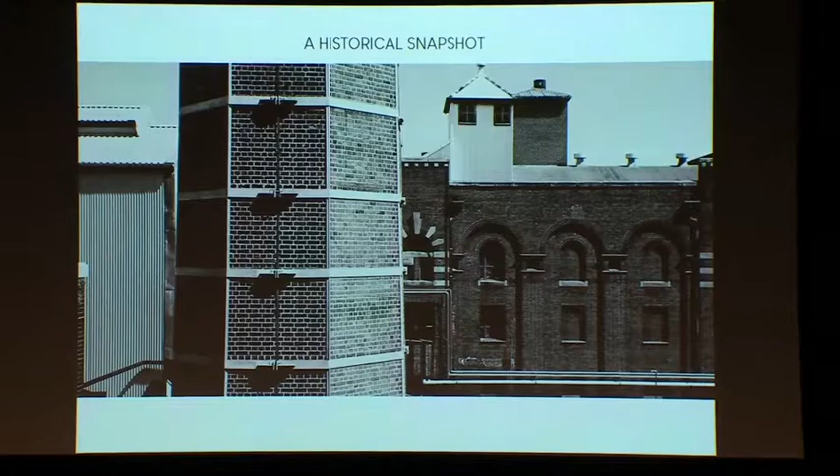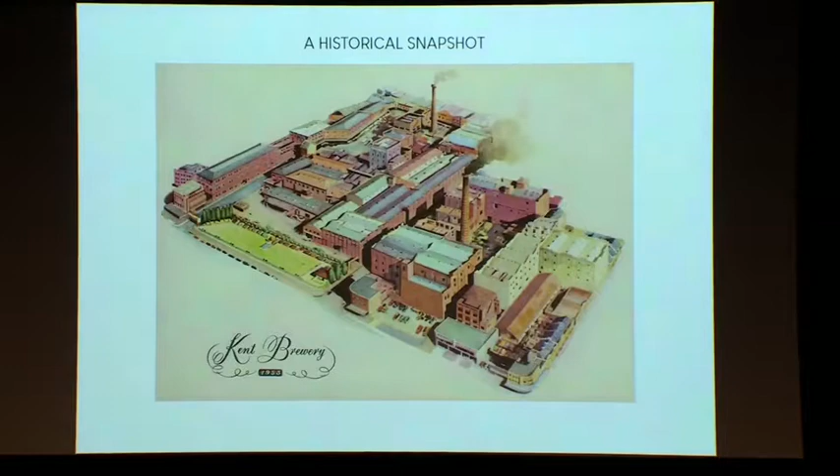It's got grain that you only get on a few projects in your life. It was landlocked. It was progressively used as a brewery since the turn of last century, and just recently, 10 years ago—this is my 11th year on the project—it became a development site.

There was an initial master plan that our client, Frasers Property, Dr. Stanley Quek, who's a Singaporean, was leading Frasers Property at the time. And we inherited this plan. It was a good urban plan.

You know, lots of streets. It was a classic kind of urbanist, Sydney urbanist plan. It had a park which was very beautifully located in terms of connecting to the existing neighbourhood.

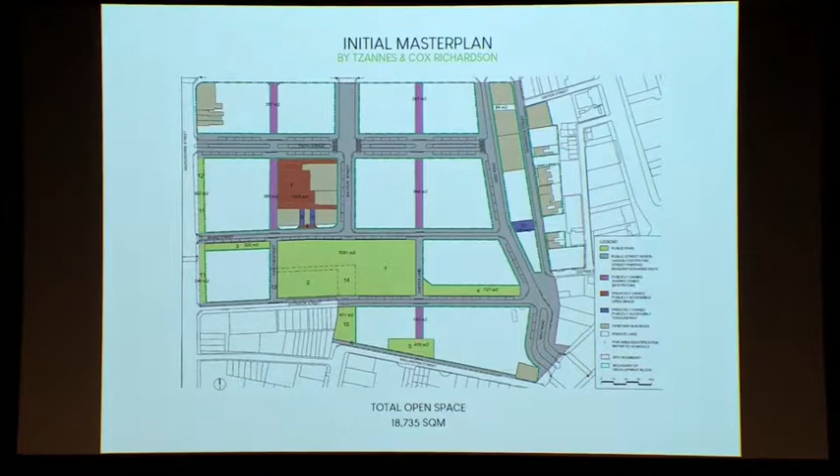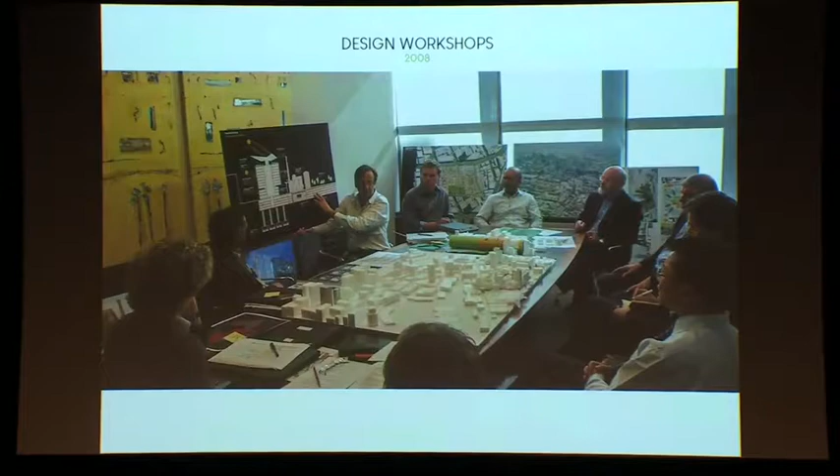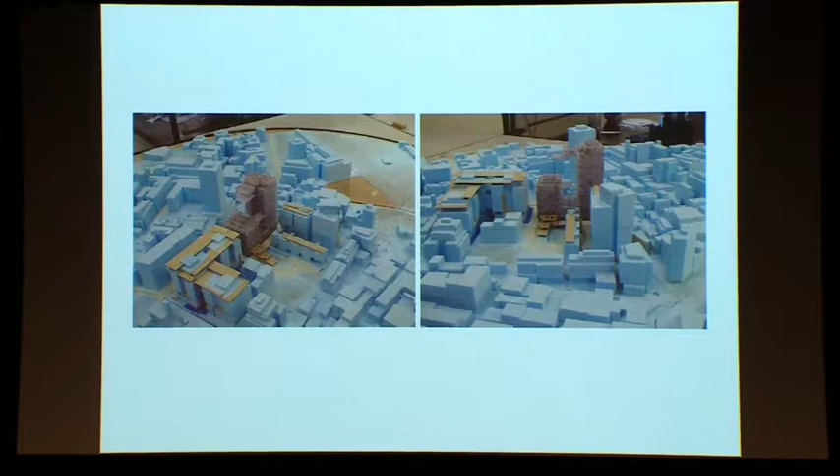But this really stitched foundations for stitching the project back together. One key thing was that it didn't have much open space. So led by Foster and Partners, I was working with my friend and colleague, Jeppe Andersen, a Dane, as we've seen today, working through the master plan team, looking to try and get more out of this project.

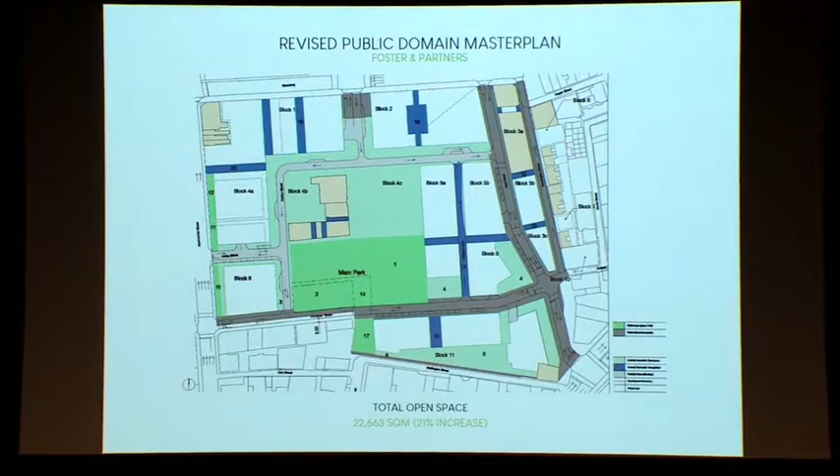So getting more from less. What we got to from the public domain perspective was, how can we move the buildings around, take a building out of the centre, shift that onto the outer perimeters? There used to be a building there. We moved the densities around to the edges, the city edges, not the surrounding community edges, and created a bit more open space.

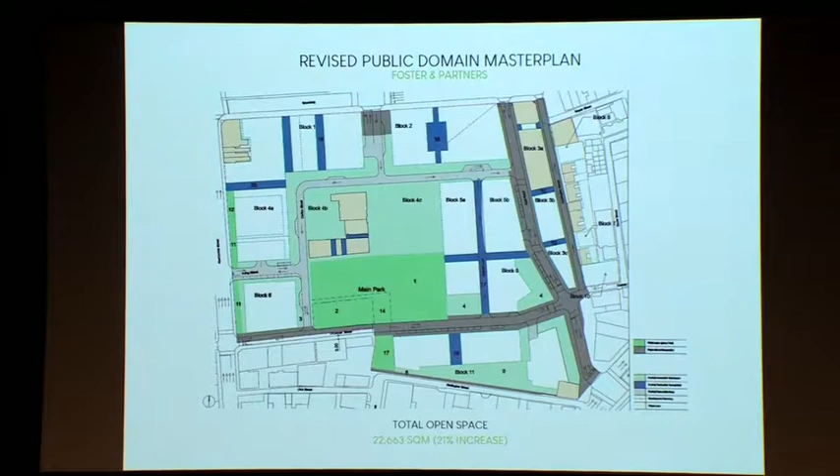We turned off a few of the streets, so took the cars out—a very anti-urban move in some circles. It was controversial, but we kept all the key links, just pedestrian now. And what you got was a very much increased open space—we managed to increase it by over 20% simply by repurposing and reallocating various bits.

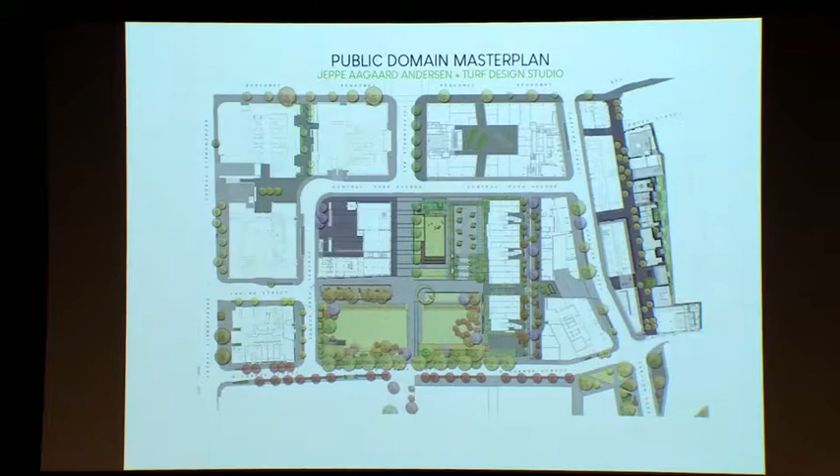If you know Central Park, it is a very dense project, and you know how used it is. I think taking those cars out and creating a kind of urban campus hybrid is generally regarded as reasonably successful. And then, as we do as designers, we start making specific elements within the plan—a whole bunch of spaces.

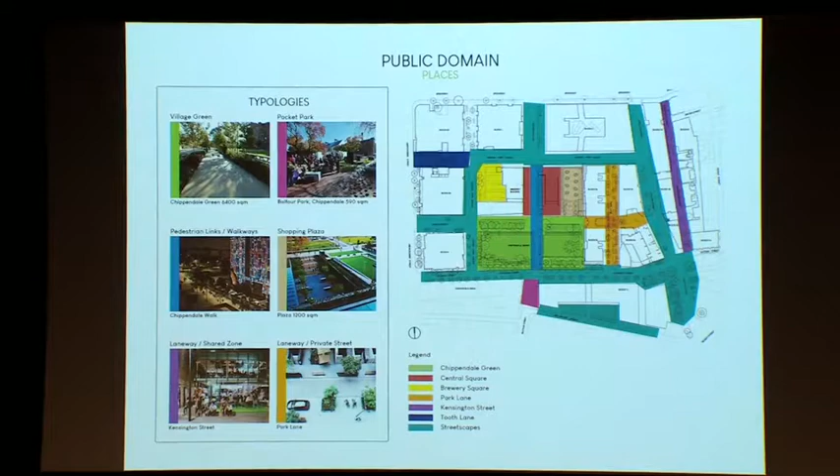Eventually came into being. But one of the key underpinnings of this project was its approach to energy and sustainability in general. It's Australia's first 5-star Green Star rated precinct, and capturing all of that, being sustainable in terms of energy was fundamental, and being reasonably sustainable in terms of water was also key.

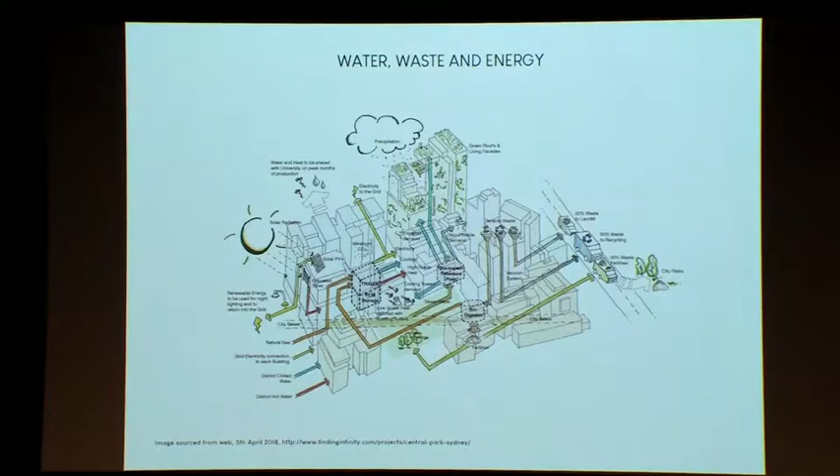So all the sewerage on site is processed in a black water treatment plant and then reused. So the project—this is about a few years ago—has grown quite a lot since then, and it's become, I think, a genuine part of the Chippendale community.

Lots of different events, lots of different people, lots of different festivals. It's just become a kind of normal part of Sydney. And I guess that's one of the things we really tried to do about this project—not over-designing it.

I think having a Dane as a partner has finely tuned my sensibilities about design. It's about making a lot from using very small interventions. How can you do the most with the least again?

So in the end, we made a park in the middle, and really it's just a piece of grass cut by a pathway linking the old neighbourhood to the city. But it took us 2 years to do that. And it was a constant process of taking away, instead of, because we all want to add.

Our job is to create new things. We want to add things all the time. Add. But we need to take stuff away. We all need to sort of self-edit. At least that's the way we work.

So, the project is just, as I said, a place you can hang around and just simply be, and it's just a normal place. And Instagram's one of our favourite ways of checking how places are going, seeing what real people are saying about these places—you can sort of check it out via Instagram as well.

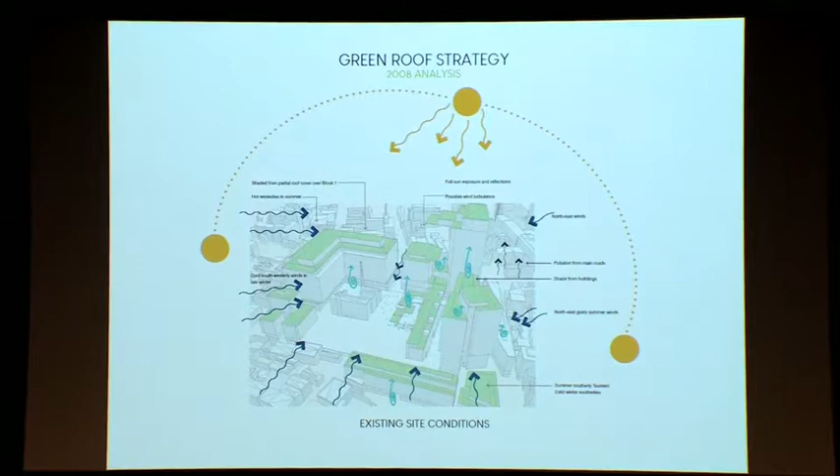We had a green roof strategy early, and talking with the architects, they were really keen to bring that down the sides of the building, and involve Patrick Blanc, the French botanist, in the project. Our job was to work with Patrick and Jean Nouvel's office to design all this in a technical, conceptual sense. It was their ideas, but we were asked by the client to prove them up to a level of comfort where they could go out to the builder and be sent on to the rest of the subsequent design work, which I think Sasha's here, Aspect and Oculus, did a fabulous job continuing.

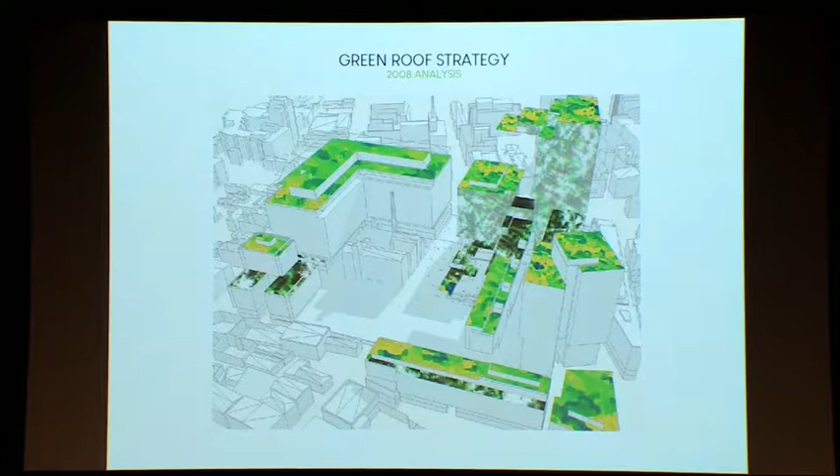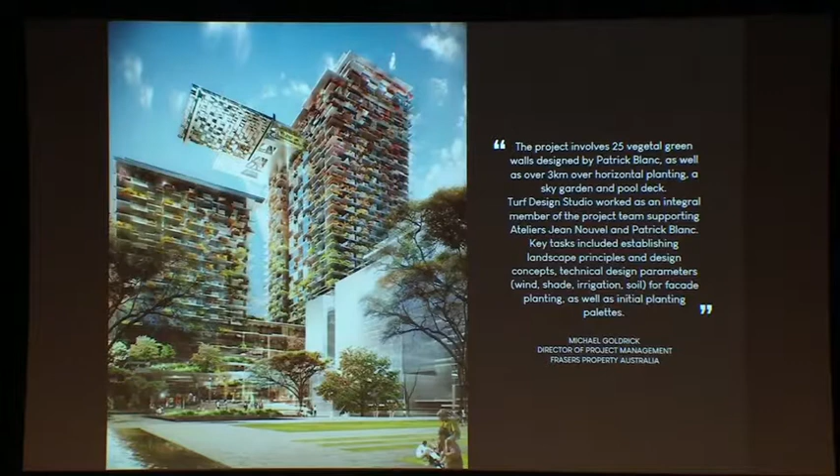There's a lot of planting on this project. When you add up the whole area, it's a football field of just planting.

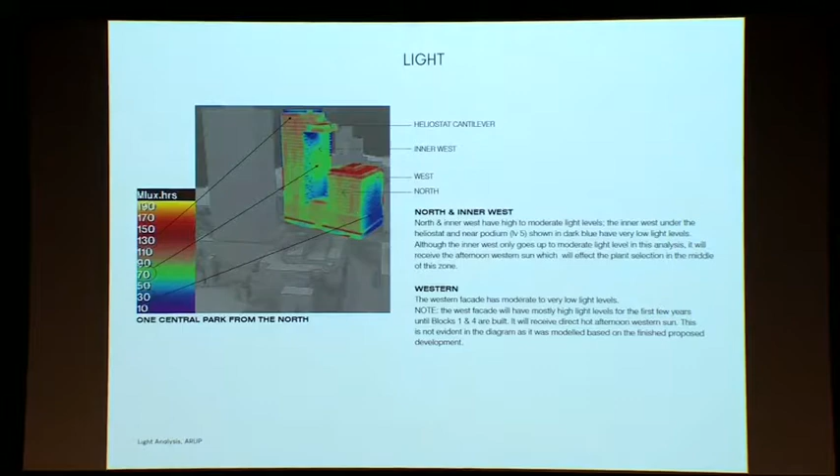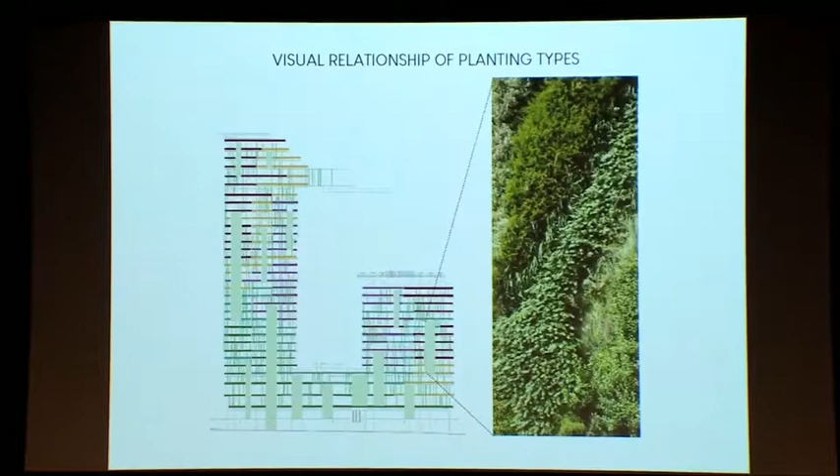Going through the technical analysis and understanding of the project was all about light, about wind, about planting strategies, what plants would work in different aspects, what sort of soils you'd need, what were the visual relationships of the planting types, all helping the architects come to grips with what they wanted to do with the building.

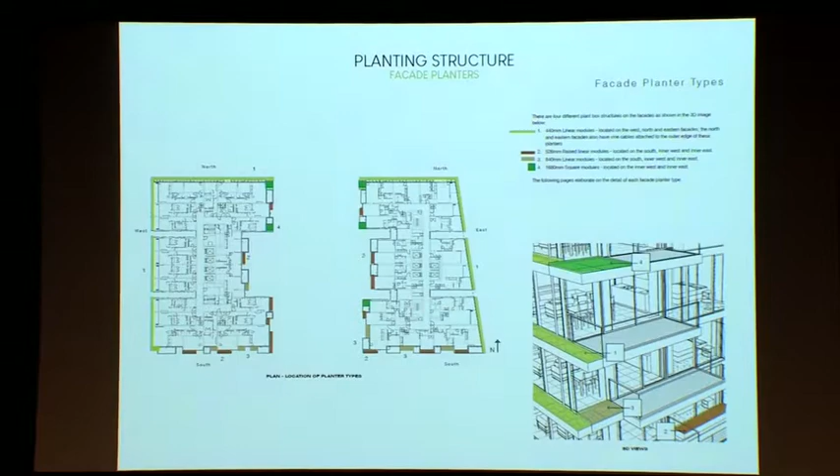Where the planting would be located, there's a lot of horizontal planting. There's 5.5 kilometres of planting wrapping around the building.

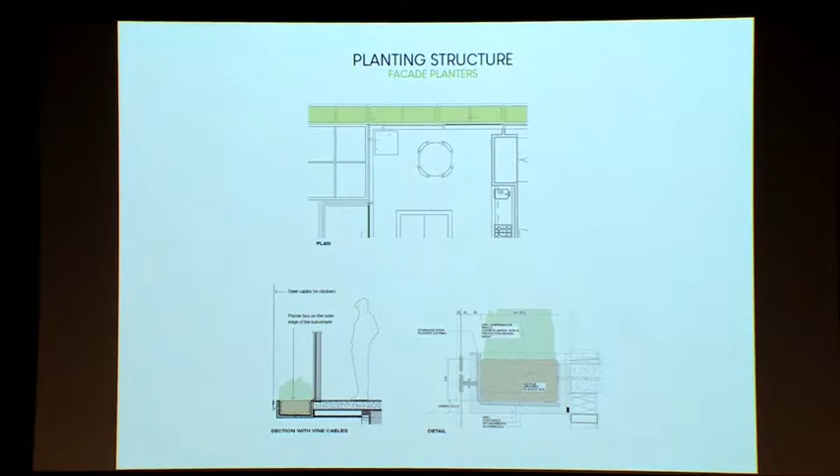So it's very shallow soils. It's almost completely water dependent. Turn the irrigation off and everything starts to fade quite rapidly. That water is completely recycled, non-potable water from the Blackwater treatment plant. So without that green infrastructure embedded in the project, this sort of initiative couldn't fly, because you can't use potable water on something like this. It'd be outrageous.

Planting palettes and so on - it takes 12 Olympic-sized swimming pools worth of water per annum to run that building. It's a lot of water. So when you think about using water, you've got to use it wisely. But if you recycle it, I think it's delivered an amazing building.

Where do I live? I live about there. I decided I'd go and live in my project. It's fabulous. You open up the sliding doors in the morning and you're just greeted with this veil of perfumed humidity. Makes living in an apartment something different, something new.

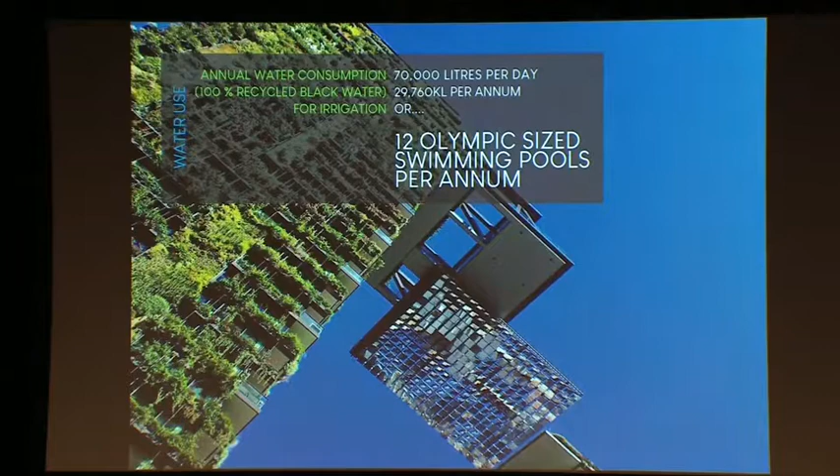It doesn't always have to be green totally, but for $160 per quarter, I get a garden in the sky. It's not too bad.

A couple of stats about that - 21 panels of Patrick Blanc's vertical green, 5.5 kilometres of facade planter boxes, not to mention the cables and the vines. So when you look at the actual plan area of what is green with the vines, it's way more - it's probably 2 football fields.

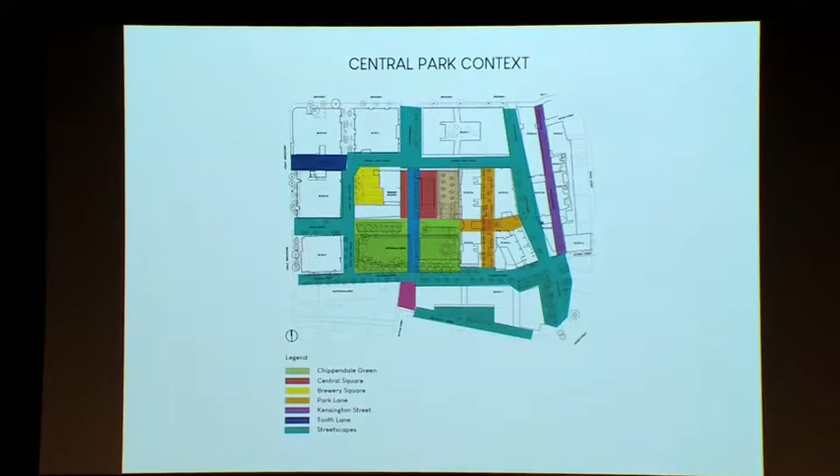There's a little project just as part of Central Park, which is right here. It's just a little aside really, because it's got nothing to do with water, but it's everything to do with resilience in terms of respecting the heritage of the area and repurposing that heritage in a new way. This project's right in the epicenter of the dawn of the Asian century in Sydney. There's enormous change going on with Chinese investment, Chinese students, education - there's a huge boom, combined with the population demographics of Australia, and I suspect it's going to continue for years to come.

The demographics are that in 12 years' time, at 2030, the millennials in the room will be the dominant population in Australia, because they're the second bubble behind the boomers. So things are changing a lot, and I think it's exciting. We're going to be dealing with these pressures as landscape architects for many years.

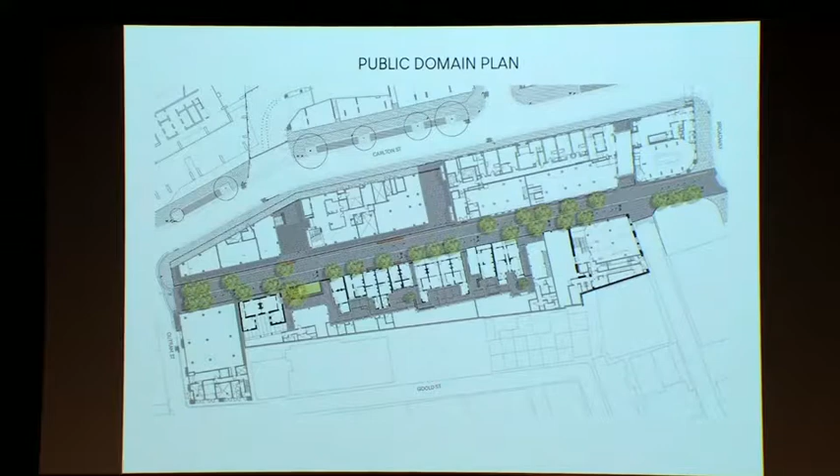This was just about how to repurpose a little laneway. Dr. Quek had this great idea of taking out all the side fences between all those old terraces, some of those soldier settlements going back to the 1850s - 1850s in Sydney is quite old - and turning it into a little thing called Spice Alley. So it's kind of working with the Chinese population, working with the student population, creating a market for food, a very Singaporean idea.

So we worked with Tonkin Zulaikha Greer architects, fabulous contemporary architects, but with a great nuanced feeling for old buildings. Again, trying to let the spirit of the place be. I think we spent probably a year figuring out that we only really needed one paving - it just needed to be a blue-black kind of brick, to create a floor and let all these disparate, eclectic, beautifully restored buildings just sit there and let things happen. We're just making the kind of set for everyday life.

And a lot of life happens there. It's a very bustling, very popular laneway in Sydney now.

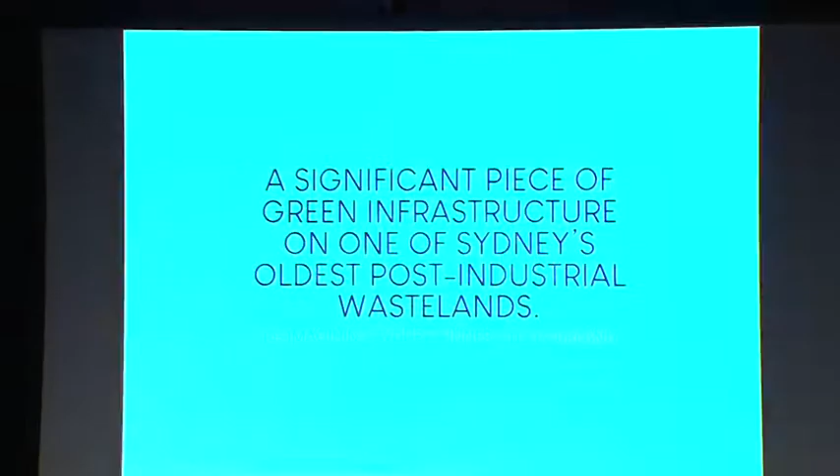So the second project I wanted to talk about is completely different, but in some ways very similar, because it's repurposing a piece of the city. This time it's an old one.

It's repurposing it as a piece of green infrastructure in an existing, fairly simple park. Sydney Park has been around for a few years. It started as a brickworks back in early last century. As happens with brickworks and quarries, they get filled up with garbage. It got turned into a waste dump, and then - what do you do with a waste dump in the middle of the city? You turn it into a park.

Usually with about this much soil over the top. You're not allowed to dig into that too much either. So we're working in a heavily remediated, polluted environment.

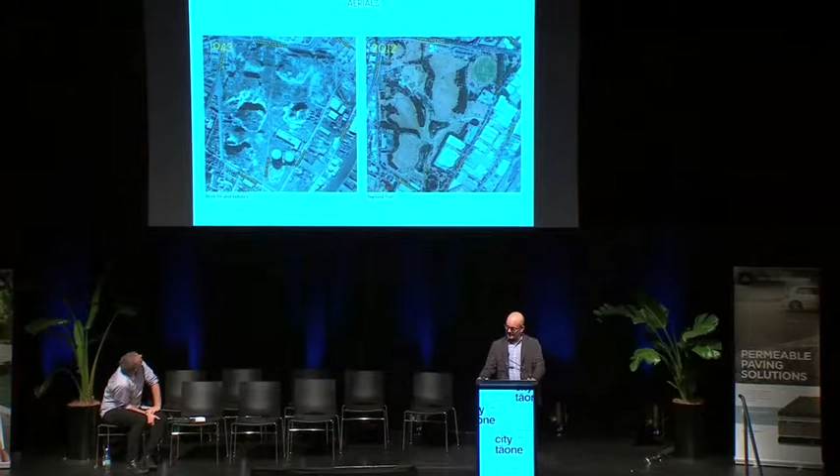It started as a public works project. It's had a series of master plans - I think the most recent was Aspect's master plan in 2004. And then it's had a series of interventions since. It's 44 hectares - that should read the Water Reuse Project covers 16 of those hectares.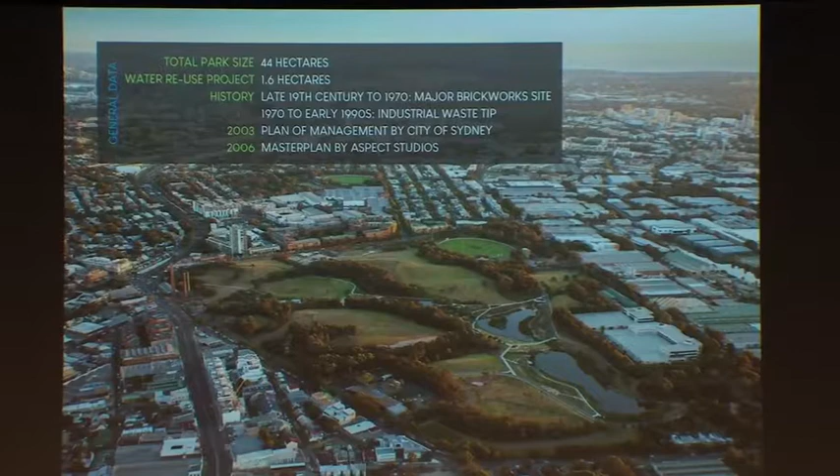The project is a joint City of Sydney and federal government initiative, so it's jointly funded. The state government likes to trumpet this project but had no involvement in it whatsoever - ironic. But there is a specific target, and why it's supported by the federal government is its objective to reuse the water. So it's bioremediation but with an end use.

So the project - there's been some great work by others, like a lot of projects we work on, including the old heritage projects. You stand on the shoulders of others, and I think that's really important, a fundamental part of our work, to understand that and build on that. It's a legacy that we get. So, whoops, I'm pointing at the wrong thing.

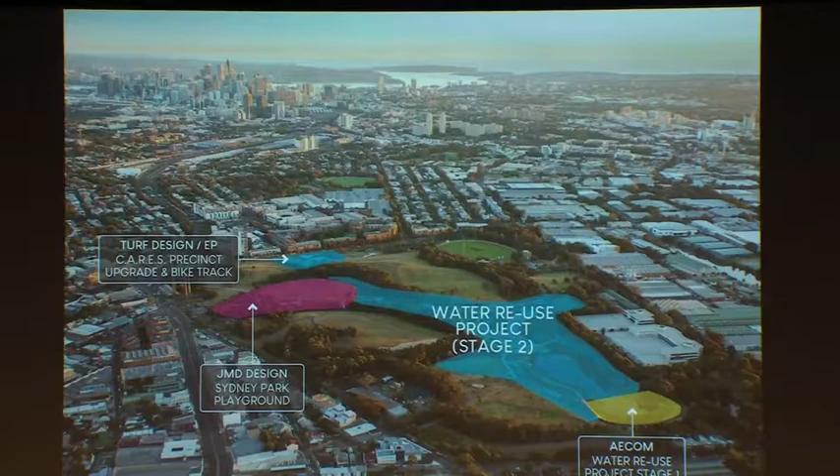Fabulous park by JMD Design in Sydney. Some work by AECOM initially in the early stage - it was a pilot project. We inherited all this work and built on it.

So our project is about harvesting this catchment. It's broadly thought of as the Newtown catchment. It's very inner-city Sydney, and it's basically collecting all the street water, harvesting the low flow, down before it gets into Alexandria Canal. So all this water drains here.

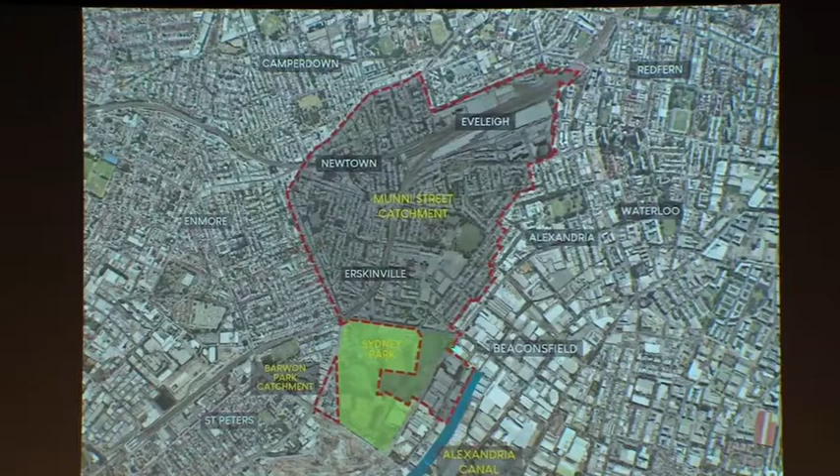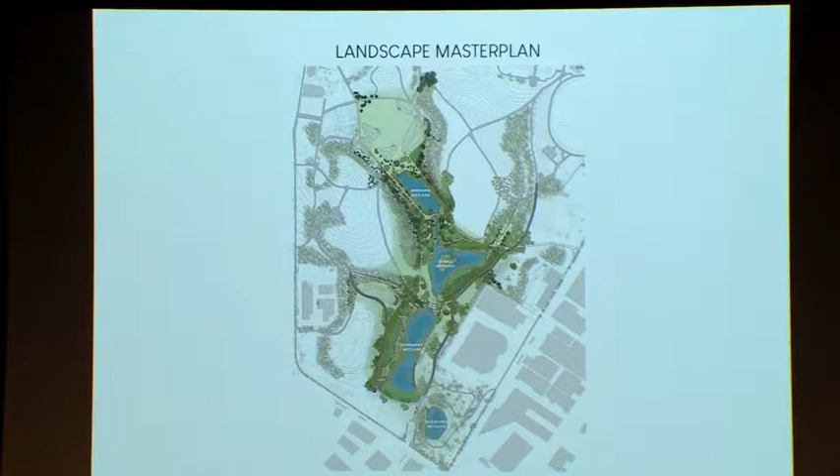We collect it and send it into a series of bioremediation beds - I would call them eco-paddies - clipped onto an existing, badly degraded series of lagoons. The water goes through those bioremediation beds, then empties into the lagoons, then we turn the lagoons over as a final polishing step. That delivers 330, on average, Olympic-sized swimming pools of water for use by the park first, and then as non-potable water for local industries. There's a lot of concrete batching plants and so on nearby.

What we did when we pitched for the work was have a kind of unusual team. I asked my friends Jenny Turpin and Michaela Crawford, they're artists, to come and work on the project with us - as artists, but not to create any art. They kind of looked at me a bit strangely. But we had an ecologist, Mia, an amazing woman.

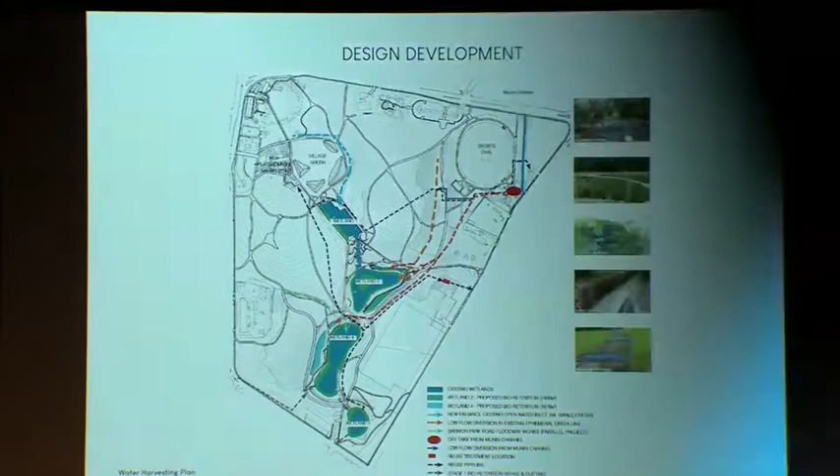And we had the eco engineers. It was just great to have another voice at the table that thought about things a little bit differently. It was very much a round table collaboration, all with a common goal of exploring this idea of this piece of infrastructure and expressing it in the most interesting way possible.

And the other key fundamental from the city's point of view was habitat. So all of these eco-paddies are viable habitats. We work very closely with the city's ecologists, and these things are just teeming with biodiversity now - frogs, dragonflies, lots of invertebrates, lizards and so on.

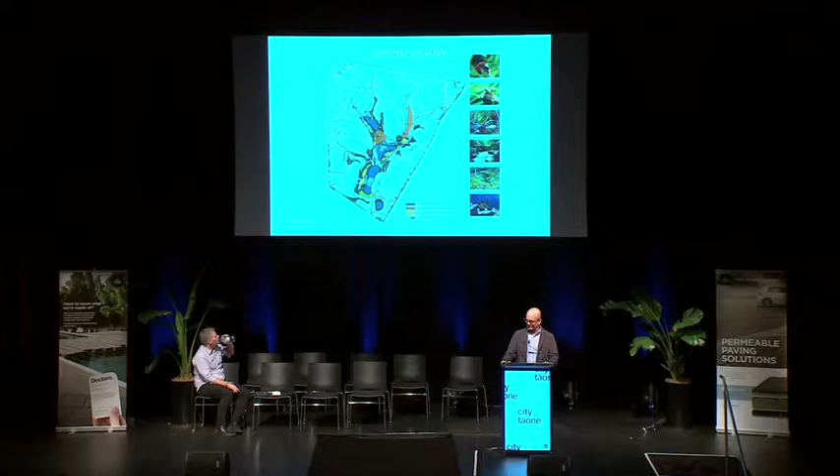This was an old detention pond which we just repurposed. We refurbished it and made it the first wetland, and you can see that up the top there. It's a lot higher, so that's also a receiving water for some of the storm flows, which are obviously cleaner. So it kind of bypasses the bioretention.

Jenny and Michaela ended up doing some art, ironically. The city couldn't resist. But the art's really just an expression of the system. It's not a piece of art that is conceived separately. It's conceived as a member of the design team.

I think it's beautiful. It really picks up, as you can see on the chimneys. They just really laid this kind of delivery, the old delivery system of the chimneys of the brickwork, and laid it over and cut them open and made that the delivery system for the water.

So you can see it there at the top, running through a series of wetlands via a cascade. There's a cascade. We really wanted to have people get into this thing and experience it. It's kind of an urban wild, if you will. It's not many places where children can kind of run free and feel like they're uninhibited and unprogrammed.

It's sort of an aerial view of it. So this is where the dirty water comes in. That's one of the bioremediation areas. You can see they're fenced. This is a dog park as well, an off-leash dog park.

So you can imagine yet another layer to this thing is managing the conflicts, as all projects do, between various users, and these are biodiversity hotspots. So the dogs aren't allowed in.

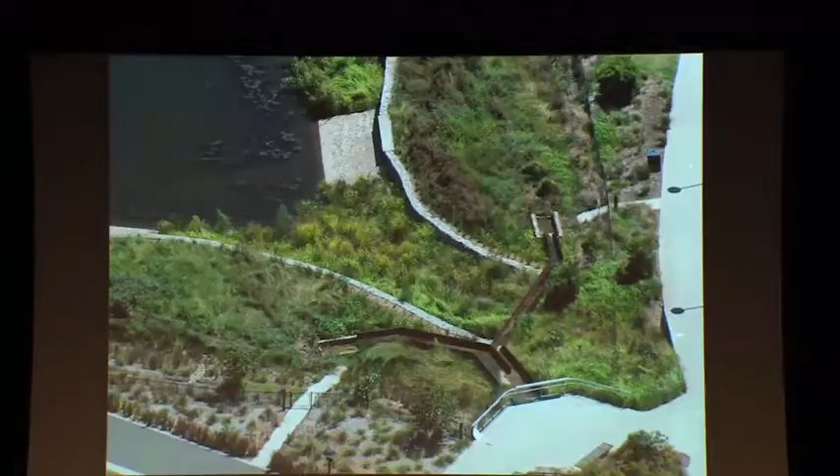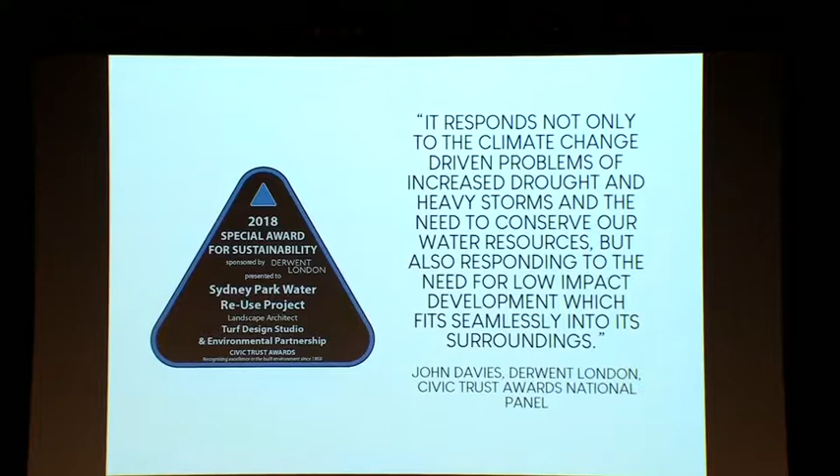I'm kind of putting this up to show off a little bit, but also to say to all of us here in the Antipodes that we do some pretty good bloody work, and we have lots of great architects and landscape architects coming in from various parts of the world to work in Sydney, and I see no reason why all our great work shouldn't be shared around the world as well. So it's great to have recognition in the UK for this project, and it's really the nature of the project that's being recognised. But I would just say to us all, we hold our heads up high. We do some fabulous. We're good thinkers down here.

And of course, it's always about just making places where people can just do this sort of thing. It's a project where you just hang out, you just walk around it and lose yourself from the day to day, be with as much nature, albeit made nature.

This is all on a garbage dump. This is completely sitting on landfill. There's no part of this project that's not on landfill. We did have to dig into it. We pulled out refrigerators and bits of car bodies and all sorts of things.

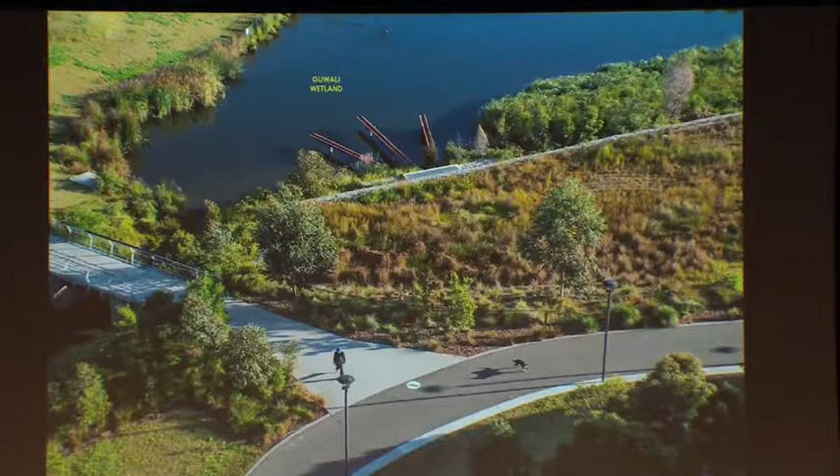This is another part of the artwork, which is the delivery pipes from the bioretention into the lagoons. These lagoons were before we started just isolated lagoons, with blue-green algal outbreaks every summer. There wasn't enough water flowing through the whole system. The bird life was suffering. Dogs were dying.

But these days, we get these little critters. Get lots of little frogs and lizards. Birds just teeming, especially all the smaller birds. I'm not a bird expert, but just making sure that you get enough small planting and enough refuge and protection.

Some of these trees were back from the early master plan. You can see these figs, they're 20 years old. They were planted in the garbage and just became stunted things. They're like pot plants. But today it's growing. It's getting better.

There'll be more projects, I'm sure, in this 44 hectares. It's very diverse. We've had the privilege of just working in one part of it. We did do a little bike path here too, but that's another story.

And again, just go on Instagram and see how people love the park. I think they love the dogs more than the park somehow. I think as it should be. The park is just the place where you can love your dog. You don't have to love the park. Plenty of people do though, but thank you anyway for your time.